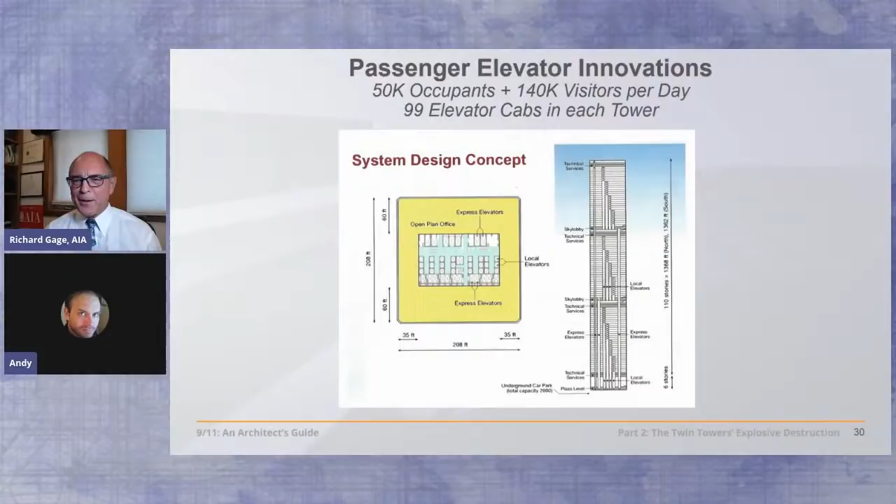They became the tallest buildings in the world, but that was just one of the achievements here. They also got 50,000 office occupants up to their places of work every day in each of the towers, with 140,000 visitors as well. There were 99 elevator cabs in each tower, and they did that by dividing the building into thirds and creating a sub-lobby or sky lobby. And then from there, people would transfer into more local elevators to get to their destination.

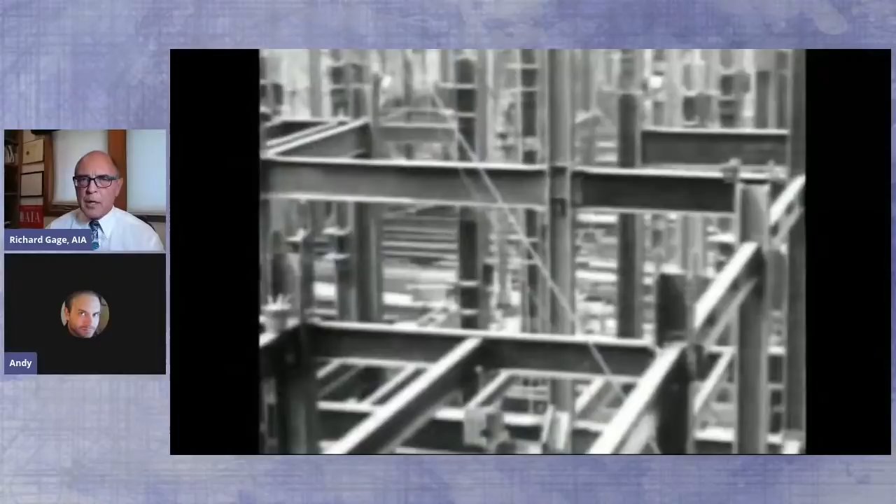But the structural innovation is what's truly extraordinary, because up until that time, we had a forest of columns through skyscrapers in general. With the Twin Towers, what they did was push half the columns out to the outside, becoming an exoskeleton with these 3 vertical columns and 3 horizontal spandrel panels welded in the shop, brought out and erected with bolts on the site. And so this is quite an innovation, because the columns throughout the building before impeded the ability of the tenants to lay out their office spaces.

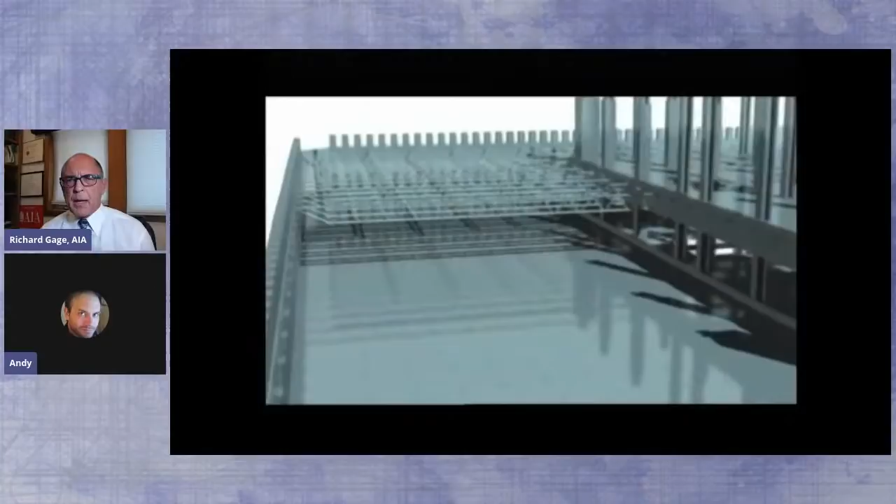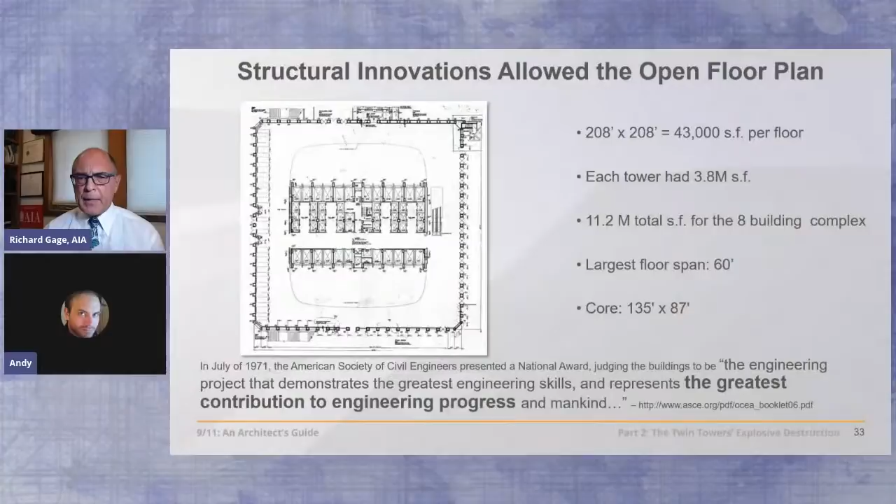In between the interior massive core of 47 impressive steel columns and the exterior were these floor trusses, which spanned up to 60 feet in the long direction, as you can see here, allowing this unimpeded access and layout of their office space. 35 feet on the sides as well. This was a complete innovation in modern office skyscraper design.

But there were still some problems. The ceilings were perceived as being low by the tenants. The columns around the outside were perceived by some as likened unto being in a jail cell, with these columns marching every 3 feet 4 inches all the way around the building. So you have some problems here that still haven't been resolved, because in the 80s and 90s, the structural innovations continued to open up the view to the landscape, the cityscape below.

So also in this building, completed in the 70s, you had asbestos, a huge problem, and the city was requiring the Port Authority to abate the asbestos according to federal law.

That was a huge $5 billion problem. And they also had a lot of electrical, mechanical, and communications systems that had to be upgraded to compete with the surrounding developing cityscape around them of office buildings. So it was a huge problem.

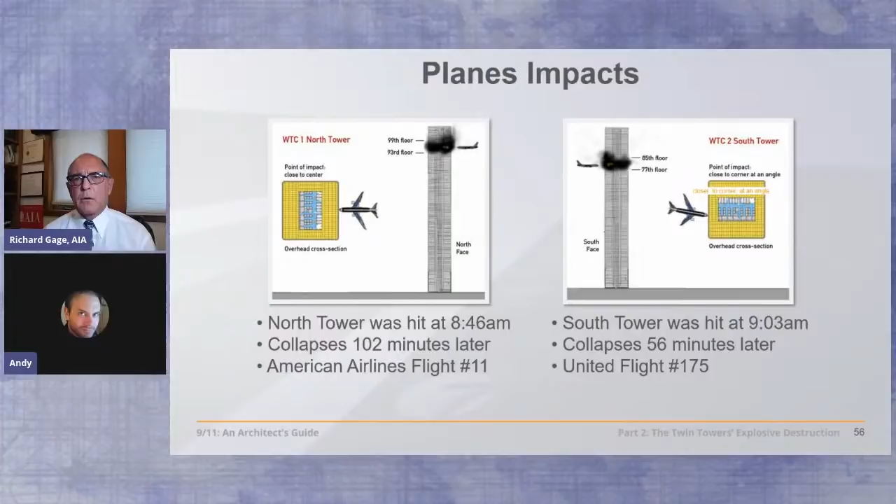Well, there were some official investigations, starting with volunteers who worked themselves into the subsequent investigations, including the FEMA report, which came out in 2002. They finally had $600,000 worth of funding, but their efforts were quite hampered. According to the New York Times, they couldn't get access to the site, to the blueprints of the buildings, crucial information, appealing to the public to get photographs. Their hands were tied. Fascinating.

NIST came along in 2002 and was instructed by Congress to do a thorough job, and they had $20 million worth of funding. And NIST, by the way, is part of the executive branch under the Bush administration. Their leadership was changed out when the Bush administration came in. Their theory was a column failure theory.

Essentially, the buildings had fires that caused the sagging of these floor trusses, because the lightweight steel trusses were said to have had their fireproofing scraped off or knocked off by the airplane impact. This caused them to sag and caused them to pull in the perimeter columns. However, sagging floor trusses can't pull in perimeter columns, so what do they do? They impose an artificial 5,000-pound load to make sure those columns were buckled all the way around the building. So then not being able to support the building.

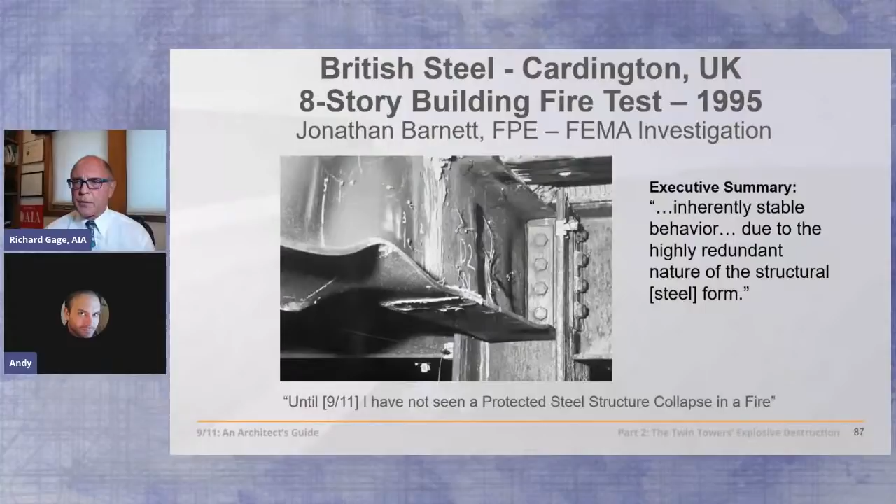But as you can see here, they are the most secure. They don't want the connections to fail. If the beam is going to fail, let it fail somewhere else. They might sag, but they typically don't fail. But let's look at some of these skyscrapers that have endured very hot fires.

May 4th, 1988, the First Interstate Bank, a 62-story building in Los Angeles, California, suffered a 3.5-hour fire which burned across 5 floors and caused an estimated $200 million of damage. It did not collapse. February 23rd, 1991, the One Meridian Plaza, a 38-story building in Philadelphia, suffered an 18-hour fire which burned across 8 floors. The fire caused an estimated $100 million worth of damage and 3 firefighters died fighting it. It was later described by officials as the most significant fire of the century.

It did not collapse. October 17, 2004, the East Tower of the Parque Central complex in Caracas, Venezuela, suffered a 17-hour fire which spread across 26 of its 56 floors. It did not collapse. August 18, 2007, a fire broke out on the 17th floor of the Deutsche Bank building in New York, a building undergoing deconstruction after being heavily damaged by debris from the South Tower on 9/11. Originally 41 stories in height, it had been reduced to 26 at the time of the fire, which lasted 7 hours and affected a total of 10 floors. 2 firefighters died of smoke inhalation.

It did not collapse. On 9/11 itself, 5 World Trade Center, a 9-story building east of the North Tower, was engulfed in flames after sustaining heavy damage from falling debris. A number of partial collapses occurred, but the overall structure remained standing.

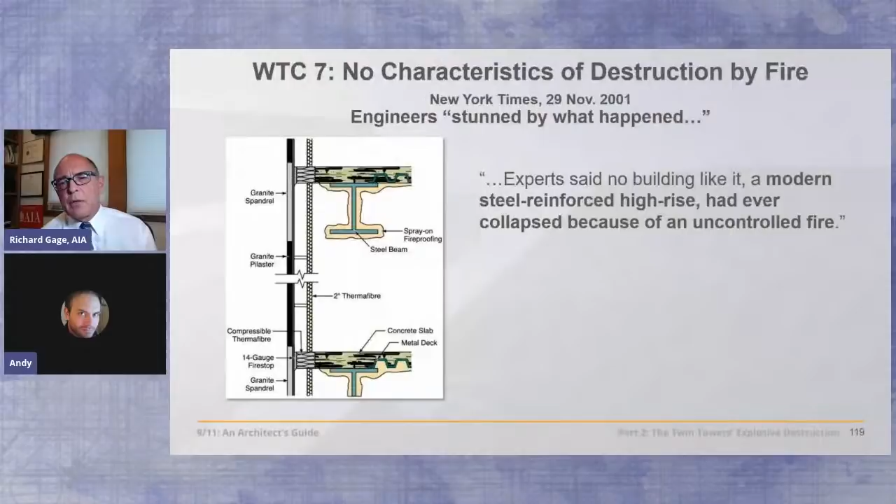So this is obviously, the engineers were stunned by what happened. A modern steel frame high-rise had never collapsed due to uncontrolled fire. Why? Well, one reason is the steel conducts the heat away from the source of the heat. So it never reaches its 1200 degree Fahrenheit temperature, at which it can begin to lose half of its strength and then sag.

But to keep that from happening, and that can happen, we put cementitious fireproofing on, protecting the beams for 2 hours in a fire, and protecting the columns for up to 3 hours in a fire, even though fires don't persist in any one location for more than about 20 or 30 minutes. So this is 4 to 6 times the amount of protection that should be required to protect this steel.

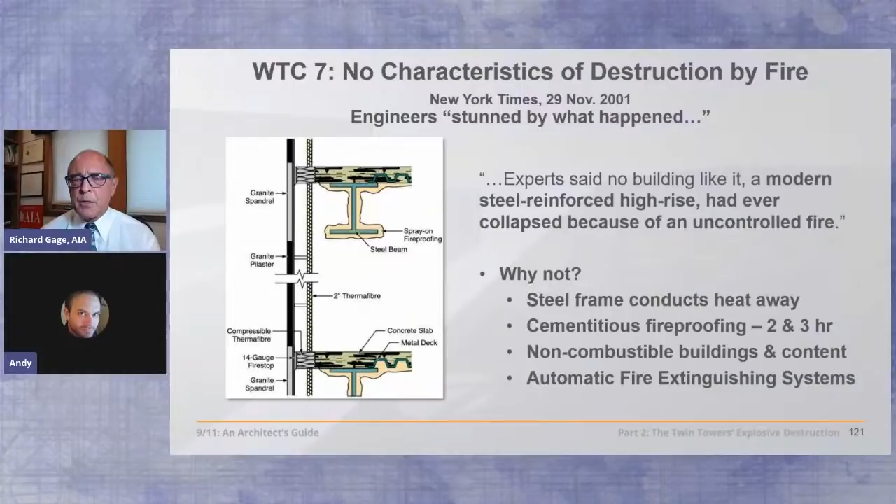But we also require the tenants to not bring in huge fuel loads, and require the contractors to not build these buildings out of combustible materials. And then, on top of all of that, we put sprinklers to keep fires from ever becoming a problem. In the case of the Twin Towers, the sprinklers were said to have been compromised by the plane impacts.

So with additional circumstantial and corroborative evidence, which can be quite helpful, government documentation, foreknowledge of the destruction, experts agreeing, at least those experts without financial or political obligations that might sway their objective opinion in the matter as to what is a controlled demolition.

Video documentation, of course, all can be proof of controlled demolition. A body of proof which we're going to apply now to the Twin Towers, beginning with feature number 1. Is there a sudden onset of destruction? And where is that? At the location of the jet plane impacts, because this is where we are led to focus on the problem, which is said to be the planes and the fires there. So let's take a look.

Here's the North Tower. It's standing still, and then suddenly, smoothly, it drops straight down. No jolting, no hesitation, no impact with floors hitting the next level of intact structure. Let's look at the South Tower, standing still, and all of a sudden, smooth downward descent. So yeah, we do have sudden destruction.

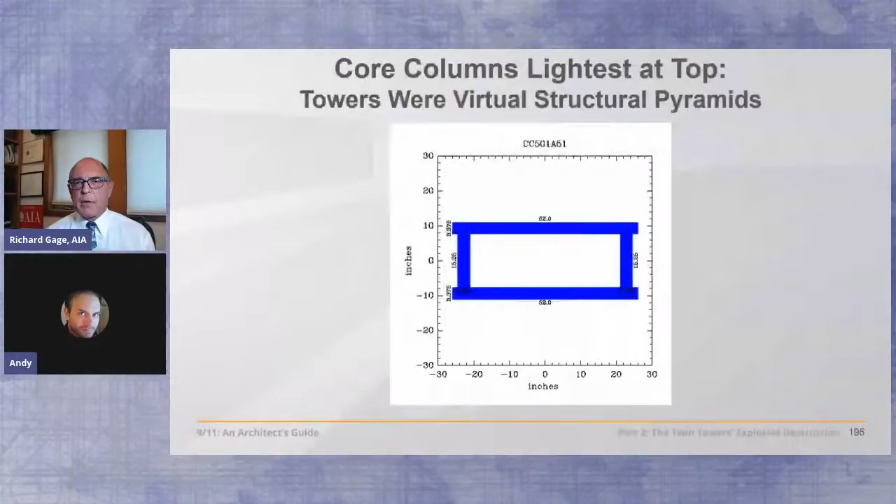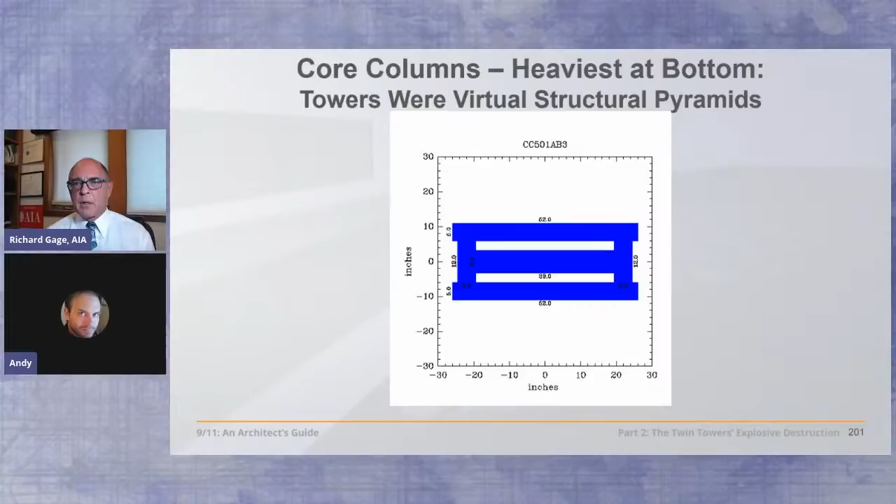The lightest part of a structure and weakest can't possibly destroy the cold, hard steel below, which is heavier and stronger as we go down. This is a column up at the top, but as you go down, they get heavier and heavier like this at mid-height, 2 inches by 32 inches by 16 inches, and then almost solid steel as you get down to the bottom. So there's a real problem with this theory. And it was submitted originally by Zdeněk Bažant from Chicago Northwestern University. It is the crush down, crush up theory, but the paper, interestingly, was submitted just 2 days after 9/11. The rest of us are in shock and awe, trying to figure out, if there are more attacks coming, what happened? We didn't even know that there were hijackers or their identities or what other targets might be aimed at.

So there's a few problems with this paper, many problems. Actually, the formulas are technically correct, but the input data is completely falsified, not to mention obscured, so that engineers couldn't even decode it. But it was finally decoded by some hardworking engineers, and they found what? They completely eliminated a story of columns, 287 columns, so that the building could develop a false impact force on the structure below. The upper section could fall freely for 12 feet. There were only a few broken columns, maybe a dozen or so.

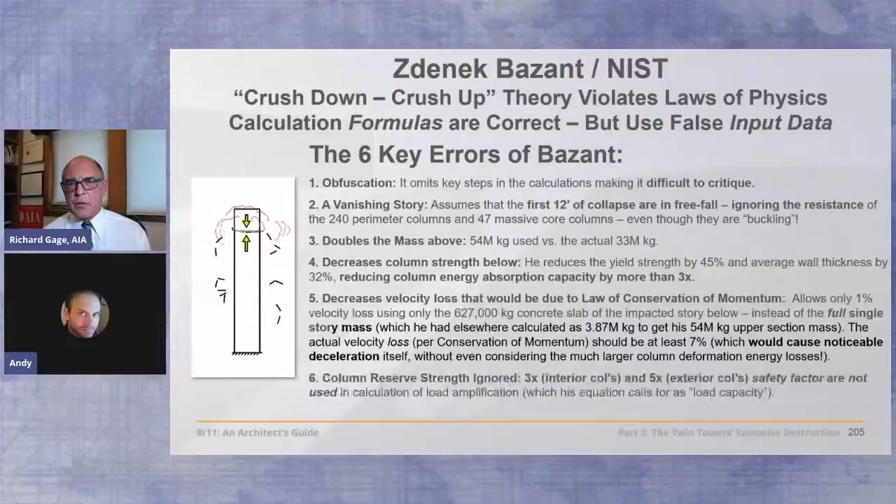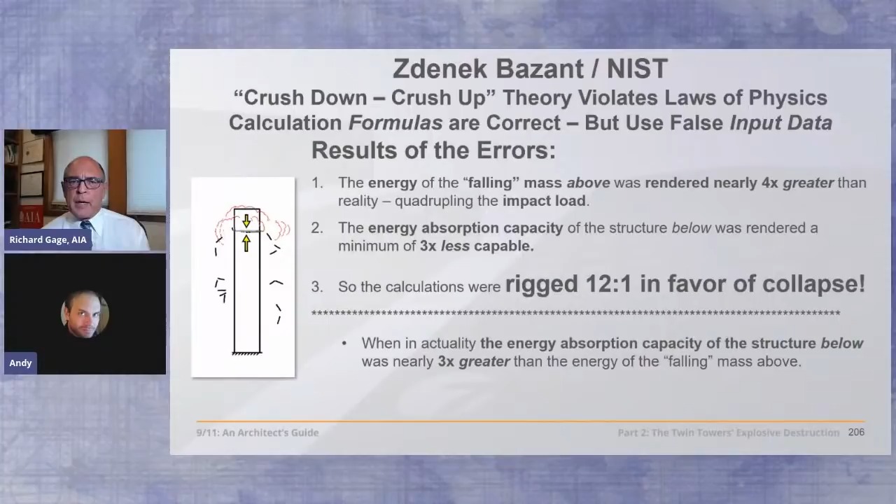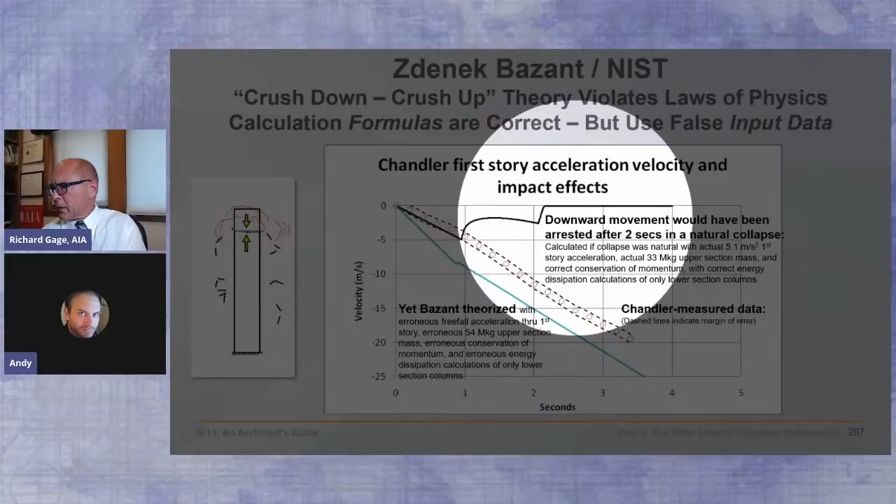We'd lose really quickly the downward momentum, and it would be arrested and come to a stop in just 2 seconds. That's what really would have happened. So there were engineers that refuted these.

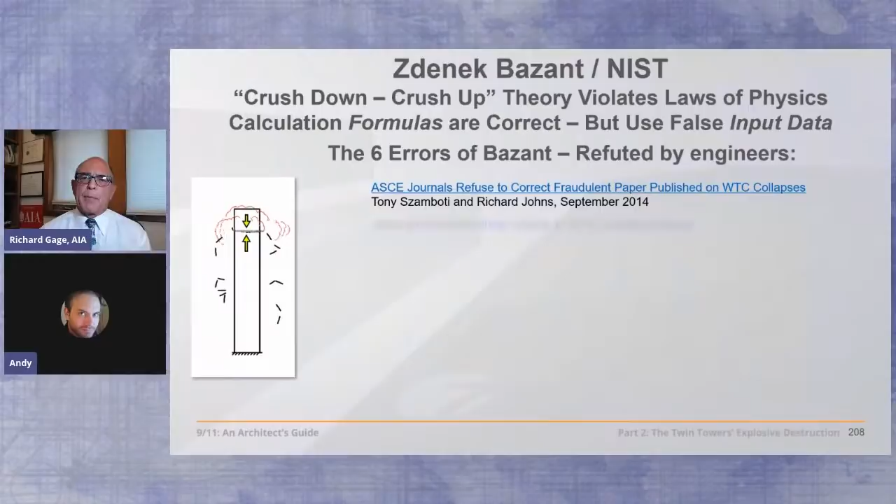The American Society of Civil Engineers journal refused to correct the fraudulent paper that Zdeněk Bažant did. And so Tony Szamboti and Richard Johns and Gregory Szuladzinski submitted papers, except the fraud was upheld by the American Society of Civil Engineers. They won't publish the papers. Why? They say they're out of scope. What? How can it be out of scope to publish a paper that refutes the previously in-scope paper?

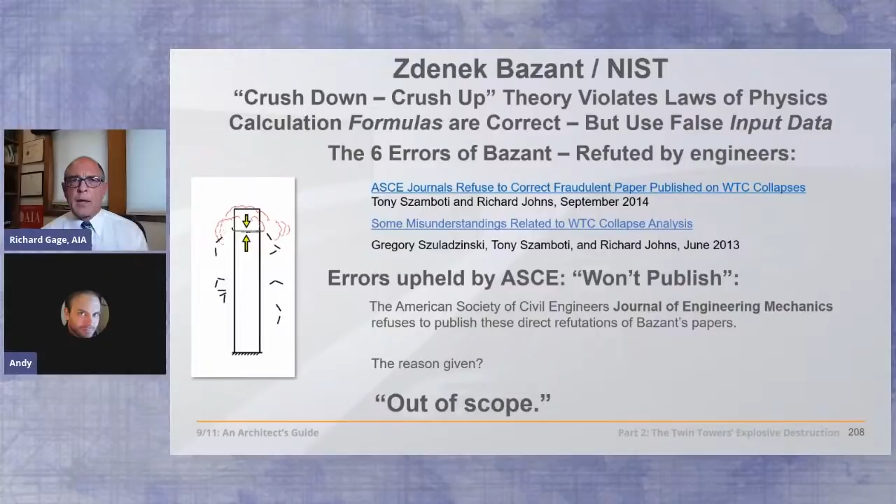Starting and stopping. You see what? Hey, hold on a second. We start and we stop. Just like the firefighters described, bands of explosions all the way around the building.

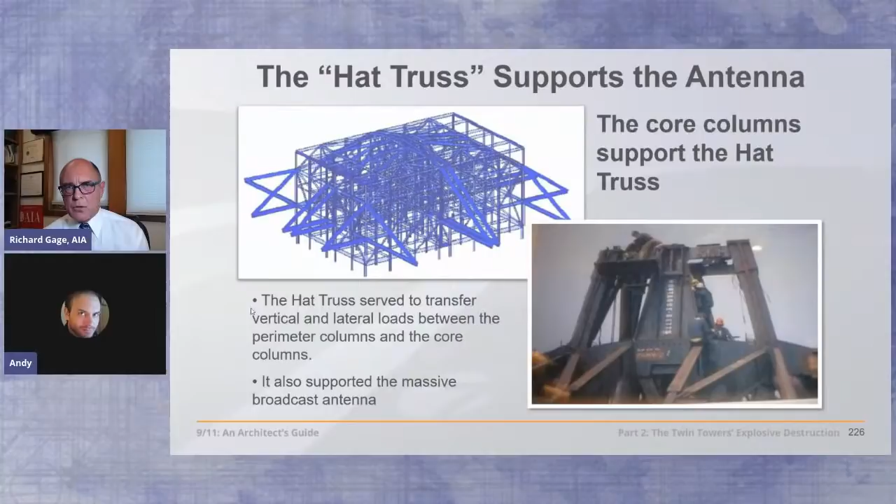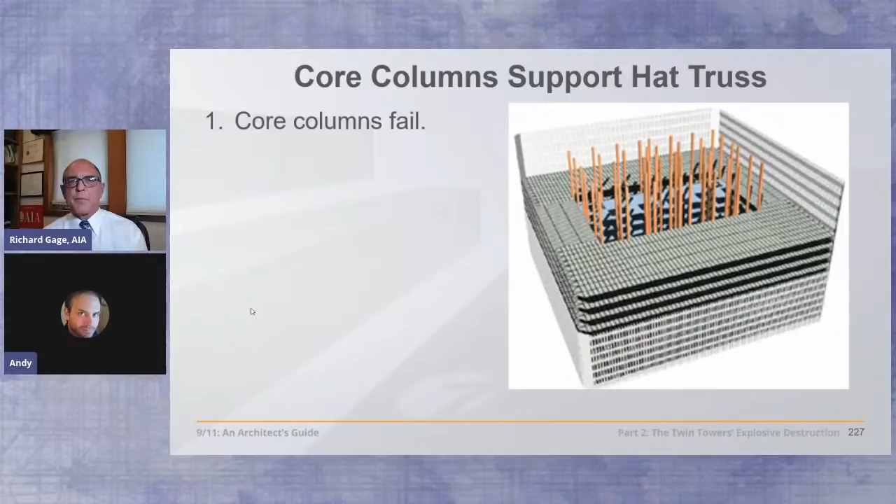Well, what's the antenna sitting on? It sits on the hat truss. What's the hat truss sitting on? It sits on the core columns. So just like FEMA said, the core columns are failing first, contrary to what NIST said, which was the perimeter columns failing first. The hat truss and antenna descend when the core columns descend, because that's what they're sitting on.

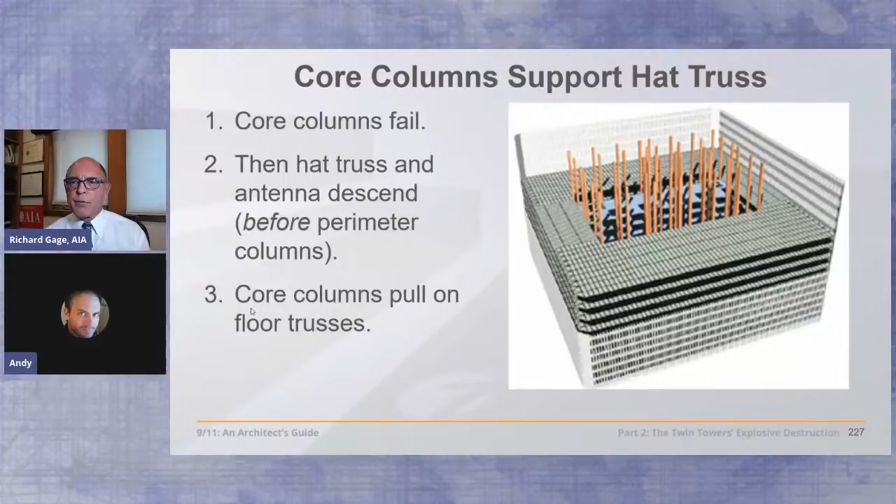The core columns then pull on the floor trusses, and then the floor trusses pull in the perimeter columns. Something like this, which we have in this crude animation from an unknown source. Well, somebody knows it. I don't.

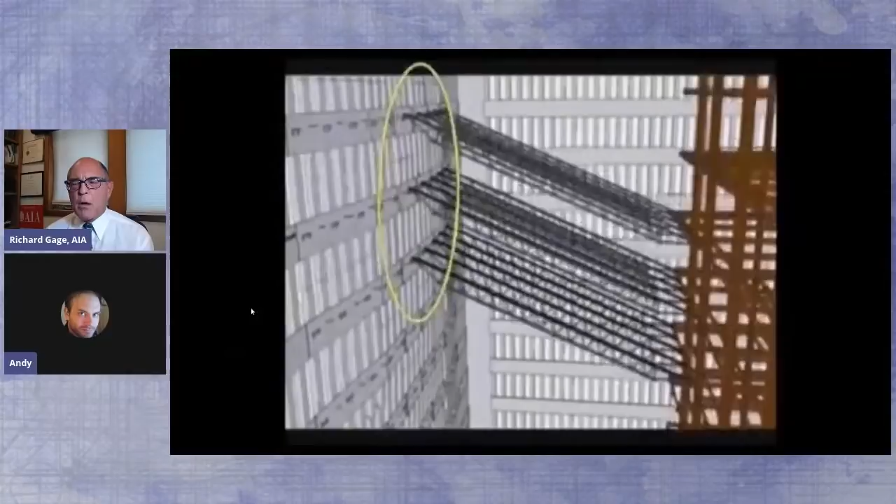So the core columns, what's causing the core columns to descend is the question here, right? Some of those core columns must have been removed. Well, how did that happen? This is all well below the airplane damage, which is at the top of this image.

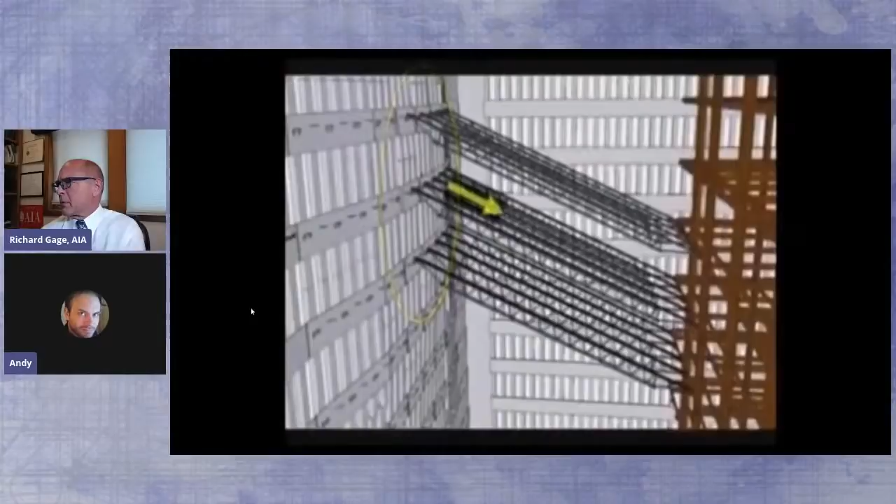In the case of the volcanic eruption in the Tongan Sea in 2009, with upward, outward arching streamers, a geometry of fireworks, freely flying solid objects trailed by thick white smoke clouds, which we'll get to in part 3 of this 3-part series. Does it even look like a gravitational collapse to you?

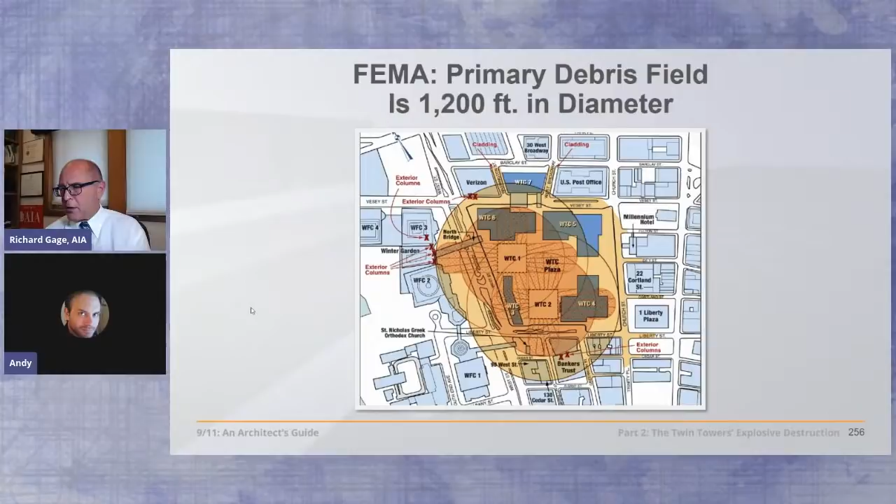We have a 200-foot wide building, but the debris is straight down or symmetrical about the tower, all around it, in a 1,200 to 1,400 foot diameter, as indicated by the FEMA report damage location of the exterior perimeter structural steel sections, destroying the winter gardens in the World Financial Center to the west, 600 feet to the west.

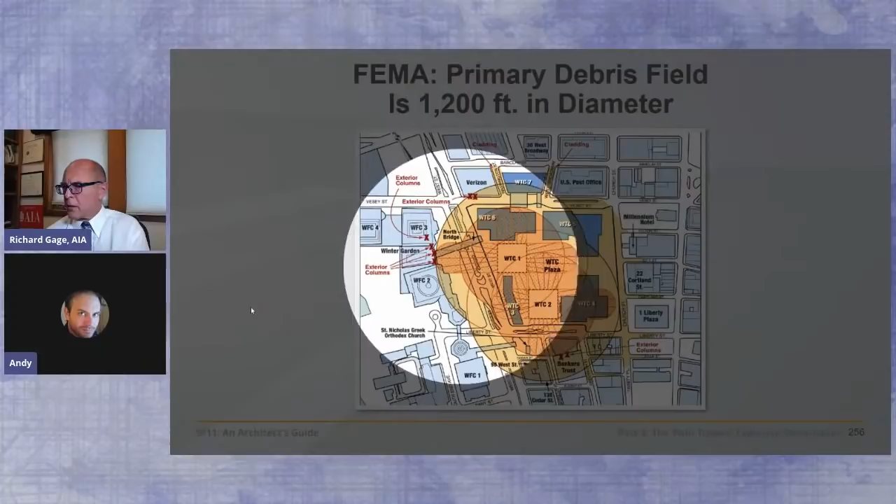As you can see here, the steel frame is completely broken up and distributed symmetrically. Broken up, ready for loading and shipment, actually. Here is the nice, neat pile of Building 7, a classic implosion. Out here, we have the very explosive event known as the destruction of the World Trade Center, evidenced by additional damage inside the World Trade Center 6 particularly.

Do we have ejections of building materials at the lower floors? Well, let's take a look at these isolated explosions occurring 20, 40, 60 stories down below what we're told is a gravitational collapse up above. NIST says, well, these are puffs of air being produced by that pile driver driving the rest of the building down to the ground. That air's got to go somewhere, right? Well, these are not puffs of air. They're solid objects, and we'll see how fast they occur.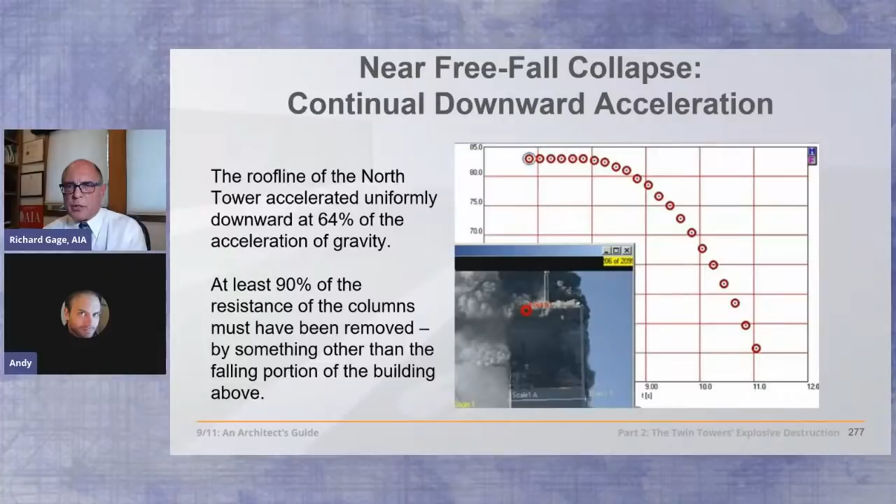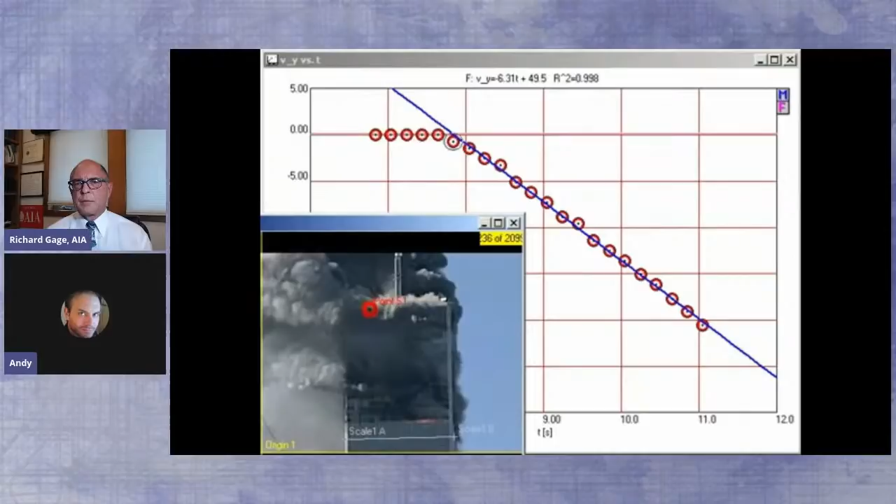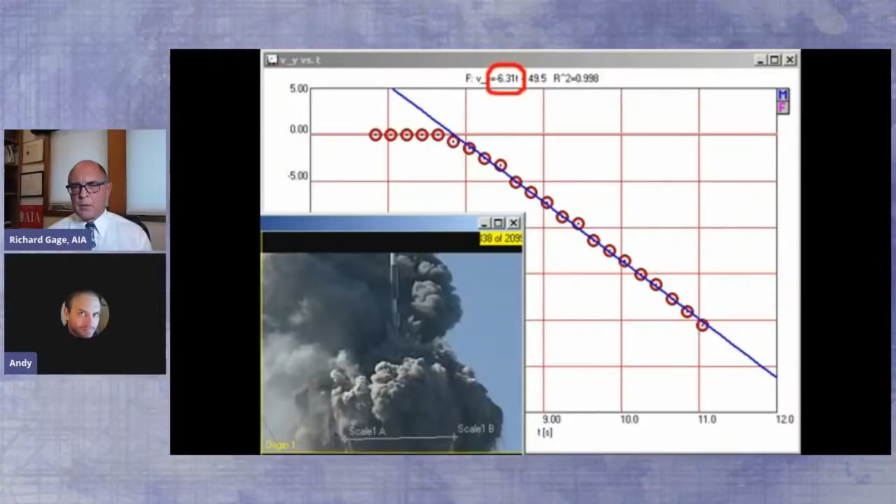We are here tracking the motion of the roofline at 0.2 second intervals through approximately 32 meters or 8 stories. This graph shows the height of the roofline as a function of time. The analysis is simpler if we plot velocity as a function of time. On this kind of a graph, a straight line indicates constant acceleration. First note that there is a sudden onset of collapse, as the point we are tracking makes a sudden transition from being at rest to an approximately constant downward acceleration. The slope of the graph indicates that the acceleration is 6.31 meters per second squared downward, which is 64% of free fall.

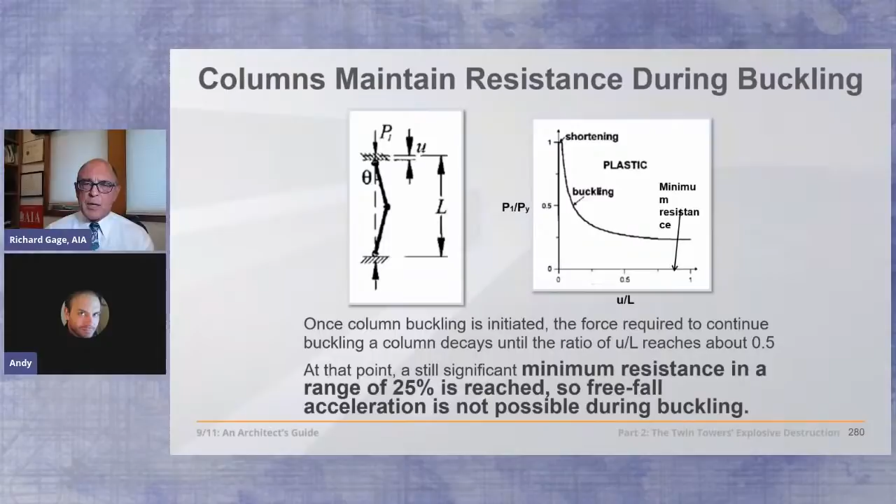64% of free fall, almost free fall. It's not slowing down, it's speeding up. And through what? All of this steel. There's more steel here on the outside than glass. How is it traveling, accelerating straight down through that? Remember, steel columns, when they buckle, still have resistance. Any resistance would slow down the acceleration to deceleration. Steel columns like these have a minimum of 25% of their capacity, even when they're buckled. So that's what's being shown here. Let's look at it another way.

On the right, we have a giant crane holding up a 15-story section, like in the North Tower of this building, over nothing but air. On the left, we take the same section and we even give it 12 feet of magical dropping force so we can develop a dynamic impact on the structure below. Below that, 80,000 tons of structural steel, 5 times stronger than it needs to be to resist a static load up above. We're going to release the lever on these at the same time.

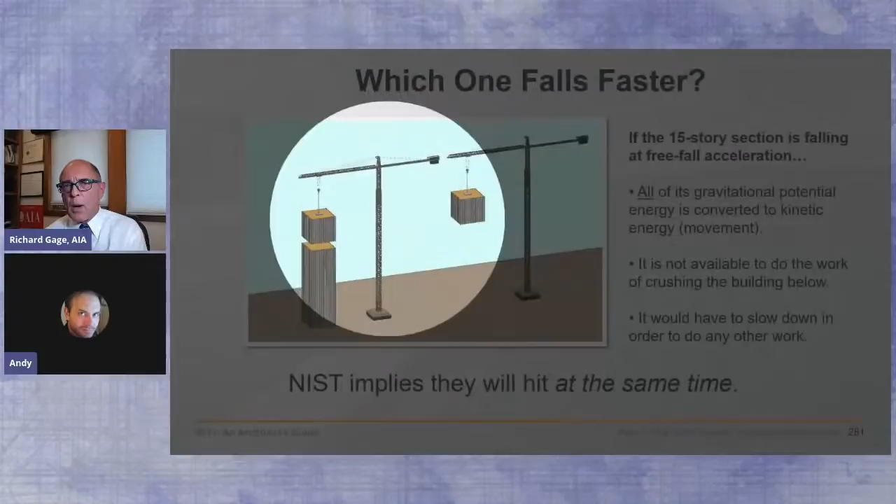What happens? This is 7th grade physics. It's intuitive. We know that the structure on the right is going to fall about as fast as NIST says it did, which is NIST said free fall. Shyam Sunder said that. The left side, it's going to impact and slow down and in all likelihood stop because the structure below, again, is a virtual pyramid. It gets stronger and stronger and stronger. There'll be an equal and opposite destructive force.

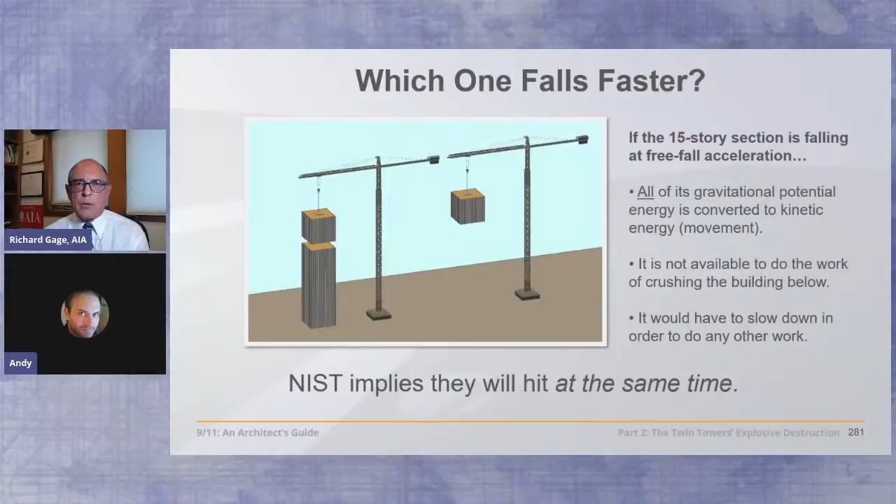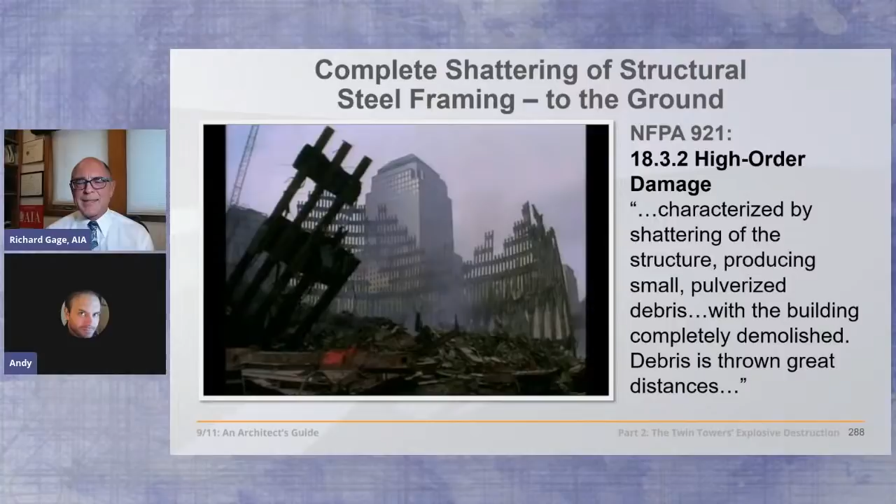Do we have the total shattering of the structural steel frame? Well, the National Fire Protection Association 921, the Guide for Fire and Explosion Investigation, says, look for shrapnel effects, high order damage characterized by the shattering of the structure, producing small pulverized debris, with the building completely demolished and debris thrown great distances. Well, we're going to be looking at all of that. Starting here with the shrapnel effects, the building is completely shattered to the ground, save these remaining shards of perimeter steel structure, broken up into its original 37.5-foot lengths, ready for loading and shipment.

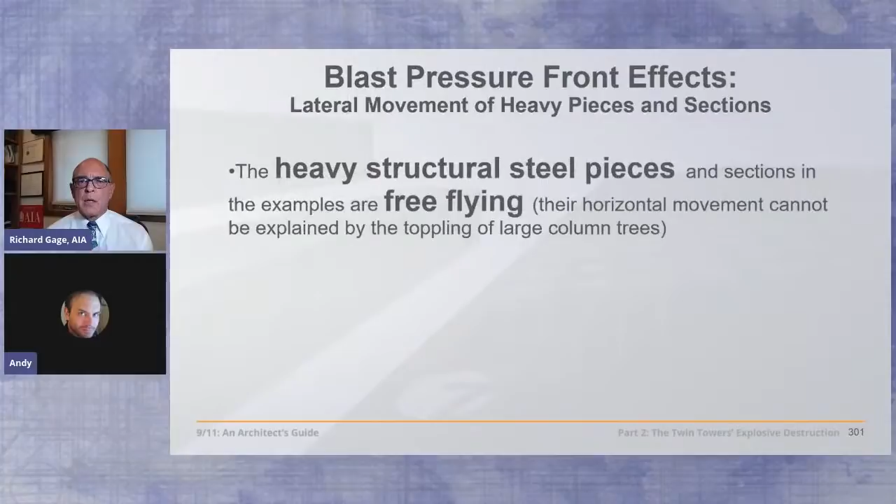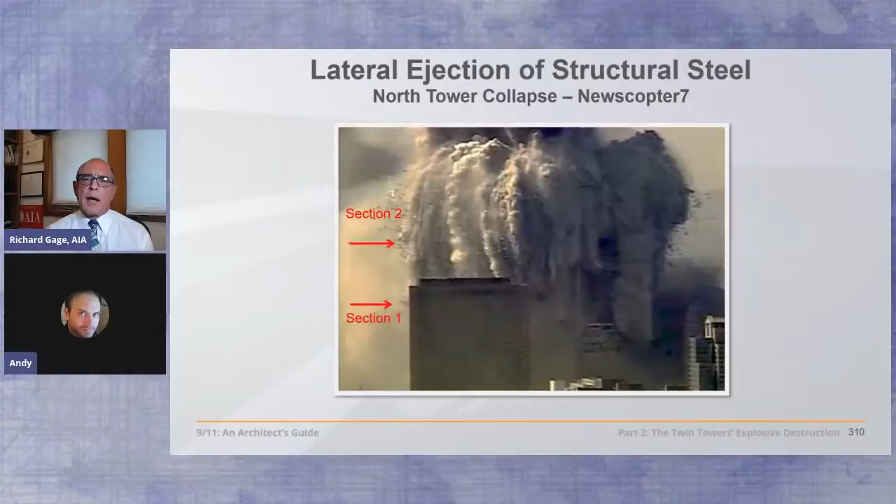Do we have the lateral ejection of structural steel components? Well, going back again to the NFPA 921, it says look for blast pressure wave effects. The heavy structural steel pieces freely flying, like you see, impaled in the surrounding buildings and destroying the winter gardens 600 feet away. And like you see in this stop and start video of these captured moments of these freely flying structural steel sections ejected independently laterally out of the Twin Towers, like this one.

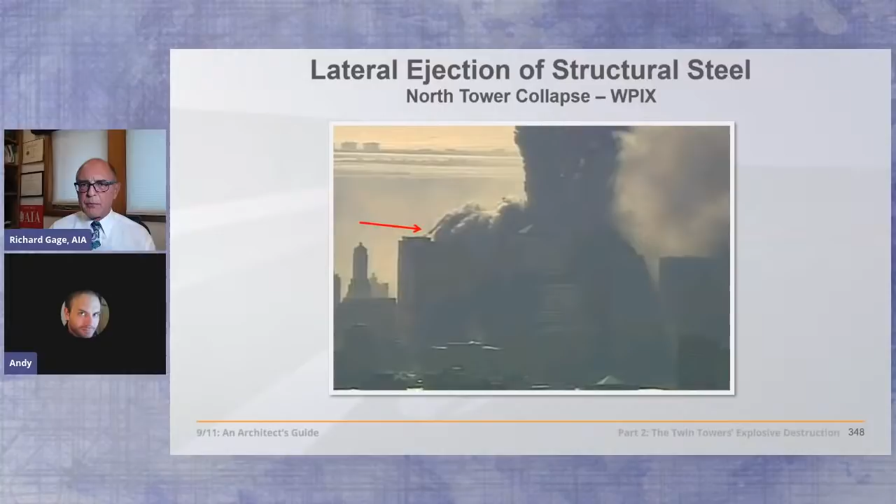This is 45 degrees here; it starts out horizontally, as you can see. In fact, it starts out up, as you can see, but then out, and then gravity begins to take over and pulls at 45. What is the outward force throwing these thousands of 4-ton structural steel sections laterally? Well, let's go to David Chandler and see if we can learn something.

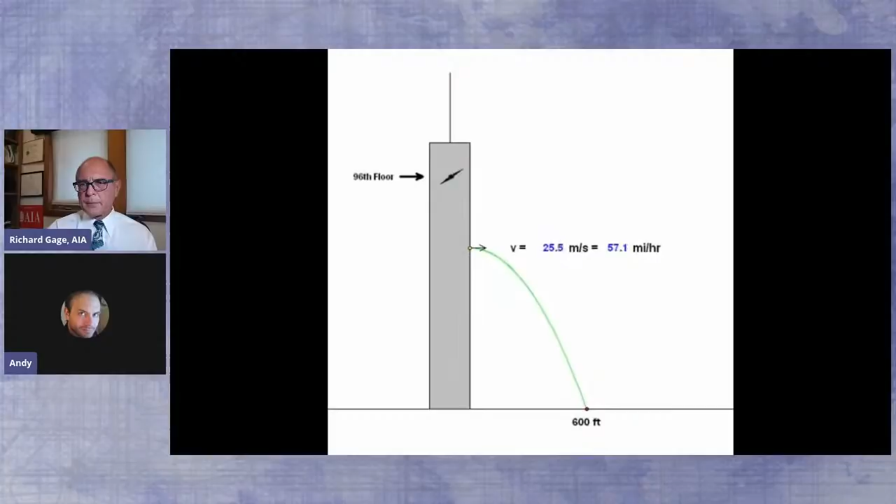Girders weighing several tons were found 600 feet from the base of the North Tower. How fast they were ejected depends on where they originated. If they came from high in the building, they were thrown outward at about 50 miles per hour. If they came from lower down, the speed had to be even greater. Gravity alone cannot account for such high lateral ejection speeds.

I'm here measuring the horizontal speed of what appears to be one or more wall units, which are being thrown northward from the North Tower. Because it was recorded by a handheld camera, I had to first stabilize the image. Then I did the measurements from the stabilized version of the video. Final result, 35 meters per second, which is 78 miles per hour.

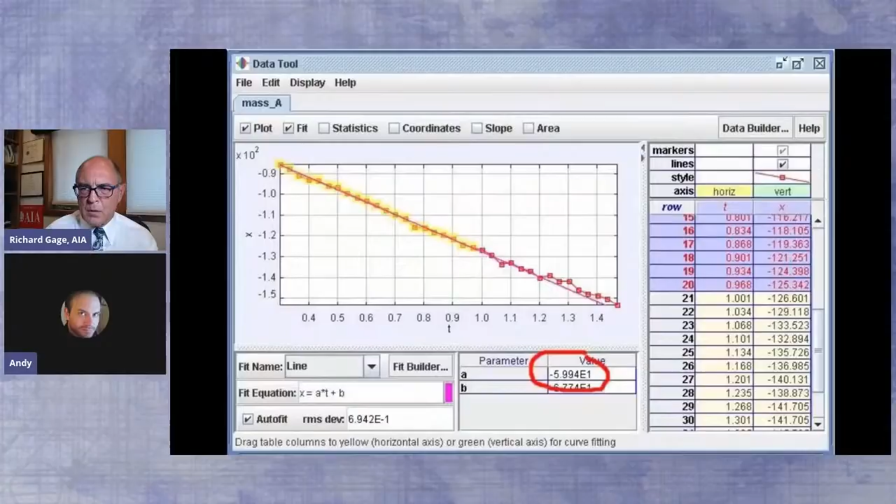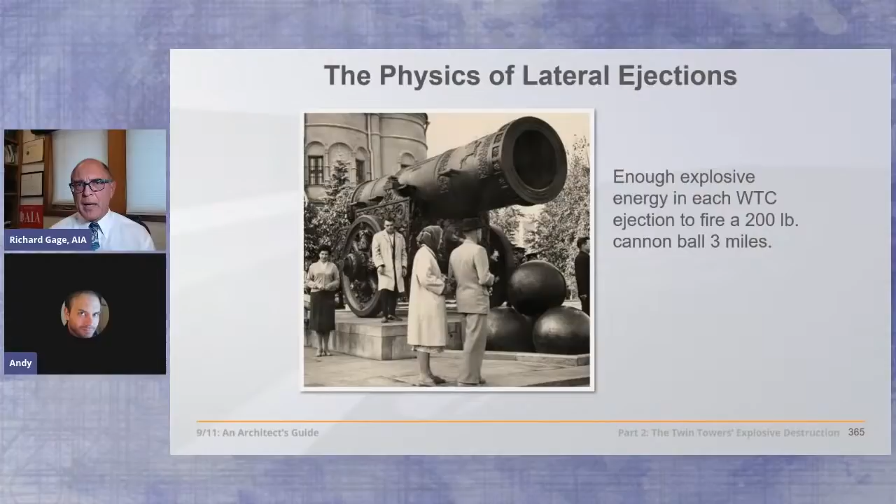So about 80 miles per hour, these are shot out of the World Trade Center. That's enough energy to fire a 200-pound cannonball 3 miles. Where's that energy coming from? And by the way, if 100,000 tons of structural steel framing is distributed, almost all of it outside the footprint, you have to ask yourself, what is crushing the building?

Because it's not available to crush the building below it. What's that crushing force? You say, maybe it's the concrete. Well, let's look at that. Because the concrete is not found down at the bottom either. There's 110 floors, each of them an acre in size, of 4-inch thick and 8-inch thick concrete slabs.

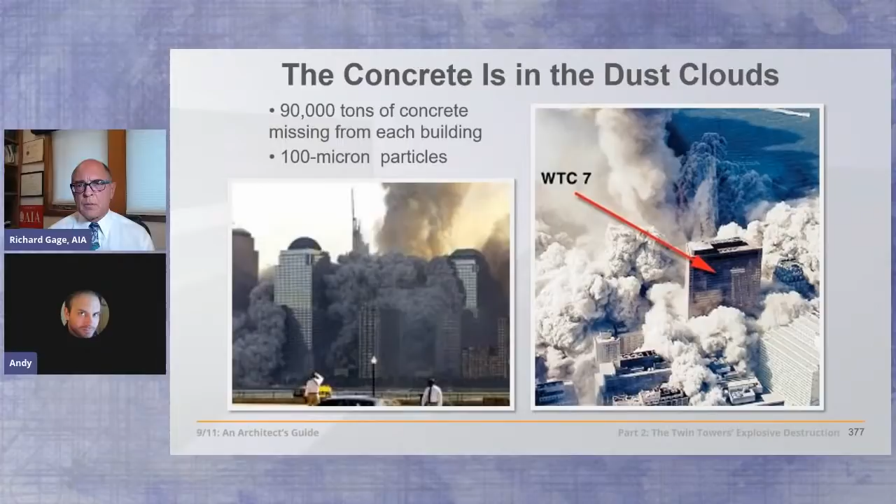And covering lower Manhattan in a 3-inch blanket over a 3 square mile area, 30% of which is powdered concrete. That's where the concrete is.

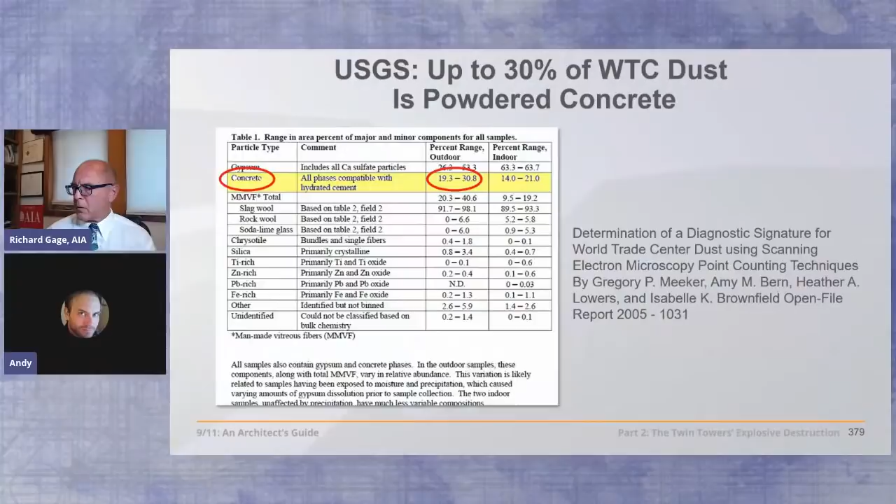And you see, and there's no concrete. There's very little concrete. All you see is aluminum and steel. What happened to the concrete? The concrete was pulverized. And I was down here Tuesday, and it was like you were on a foreign planet. All of lower Manhattan, not just this site, from river to river, there was dust, powder, 2-3 inches thick. The concrete was just pulverized.

You have two 110-story office buildings. You don't find a desk. You don't find a chair. You don't find a telephone, a computer. The biggest piece of a telephone I found was half of the keypad, and it was about this big. The building collapsed to dust.

What I expected to see was nothing like what I actually did see at the time of my arrival at the site. There wasn't much that you could say, you could describe. Everything was dust and metal. There was no typewriters, there was no chairs, there was no nothing.

Well, by the way, oh boy, hang on one second. We're gonna fix this. There we go.

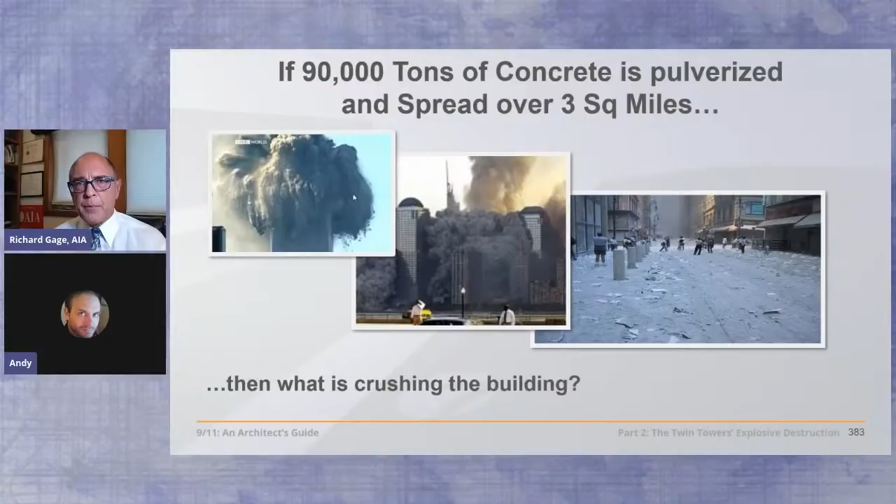If 90,000 tons of concrete is pulverized and spread over 3 square miles, what's crushing the building? It wasn't the steel. It's not the concrete. Together, these are more than 2/3 the weight of the building. They're not available to crush the building. Think about it. Something else is destroying this building.

And all the file cabinets, except for this one, which is the only one that they could find. It was saved, I guess, because it was in the basement. It was in an ice cream store. Where did 10,000 file cabinets, steel file cabinets, go? Where did the people go?

In April 2006, New Yorkers were distressed to learn that bone fragments, human remains from 9/11, had been found on the roof of the nearby Deutsche Bank building. And how, in God's name, did those fragments get there? And bone fragments less than a centimeter long. How could they be so small?

Wait a minute. We're talking about 700 bone fragments found on the top of this building, the Deutsche Bank building. Well, they didn't come from the people in this airplane because it hit the South Tower and its ejections went out this way. It didn't come from the people in this airplane because it hit the North Tower and those ejections were blocked from hitting the Deutsche Bank building by the South Tower. So they're not from the people in the planes.

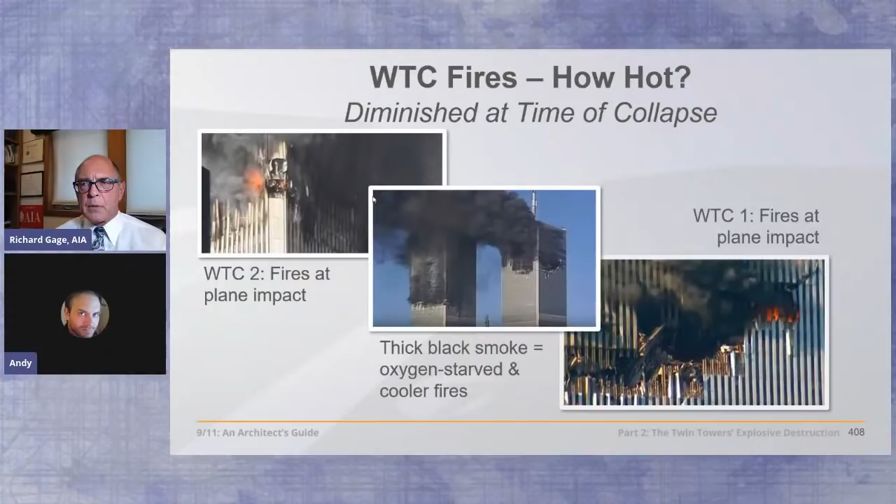And what we've seen so far in part 2 of this 3-part series is direct evidence of destruction with explosives. Fire doesn't create these features, especially these fires that are diminished and cooler, indicated by the thick black smoke. With additional testimony and research work on the part of Graeme MacQueen in 2015, he increased that number from 118 witnesses among these 503 FDNY professionals to 156 that observed explosions. So that work is now available. And 36 reporters, additionally, TV reporters, brought us the Twin Towers explosive demolition also.

Let's dig into this, because there's a widely held belief that the Twin Towers collapsed as a result of the airplane impacts and the resulting fires. That's a revisionist history or theory we're going to show you. The vast majority of TV reporters on the ground who witnessed and who reported the event firsthand cited explosions as the cause of the collapse, which you're going to see here. Most people have no idea because the story changed abruptly the next day when the local TV anchors and national mainstream outlets reported a different story.

Fire Marshal John Coyle, firefighter Christopher Fenyo, explicitly support this finding.

I thought it was exploding, actually. That's what I thought for hours afterward. Everybody, I think, at that point still thought these things were blown up, as we heard earlier. At that point, a debate began to rage about whether to continue the rescue operations in the other still standing tower, because the perception was the building looked like it had been taken out with charges. And firefighters don't go into buildings that are exploding. They're not supposed to.

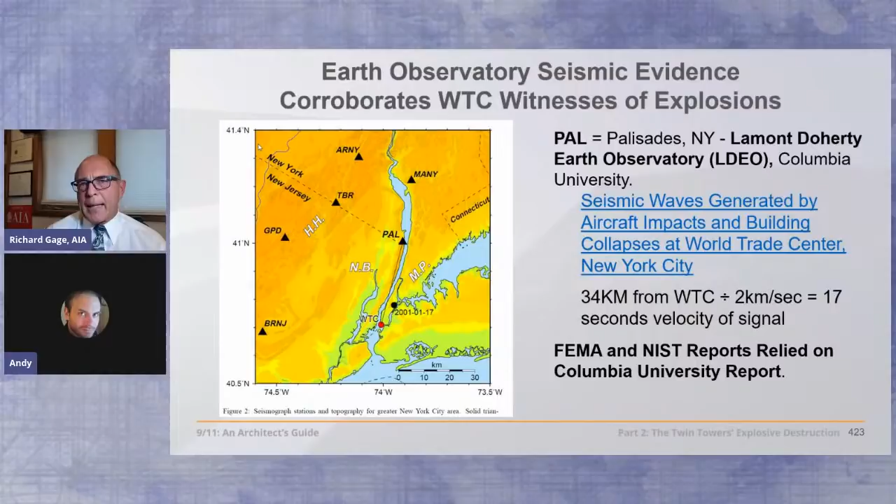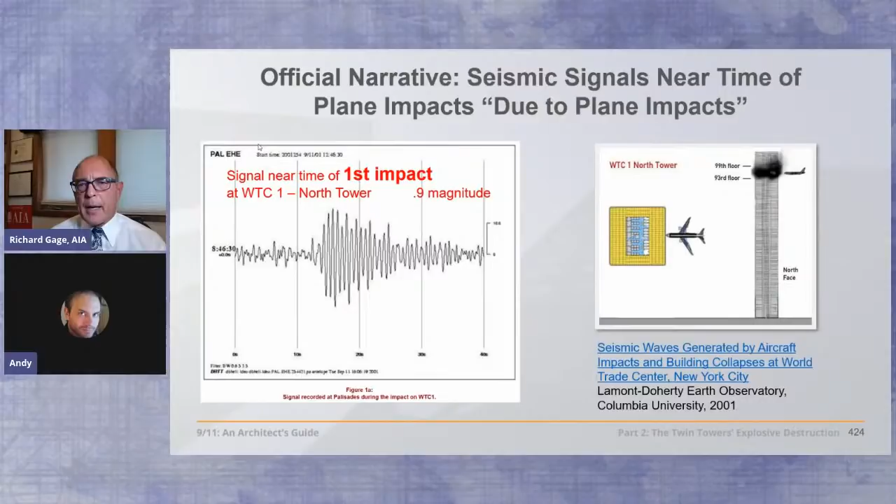What did they witness? Now, FEMA and NIST reports relied on the Columbia University report, and there were seismic signals near the time of the airplane impacts. So necessarily, perhaps it was deemed to be caused by the plane impacts. Maybe a rational hypothesis at first. So let's look at it in greater clarity.

Let's dig into this, though, because the seismic event occurs at 8:46 and 26 seconds, but the plane doesn't impact for another 14 seconds, according to the NTSB radar, which is accurate to within a second. So how can the plane impacts cause the seismic event 14 seconds earlier? Doesn't make sense. NIST comes along and says, well, gosh, we reviewed the videos and we think the plane impacted 10 seconds earlier than that. What? You're just going to ignore the NTSB radar that the 9/11 Commission relied on that's accurate to within 1 second? Well, you still got 4 seconds. So what are you going to do with that?

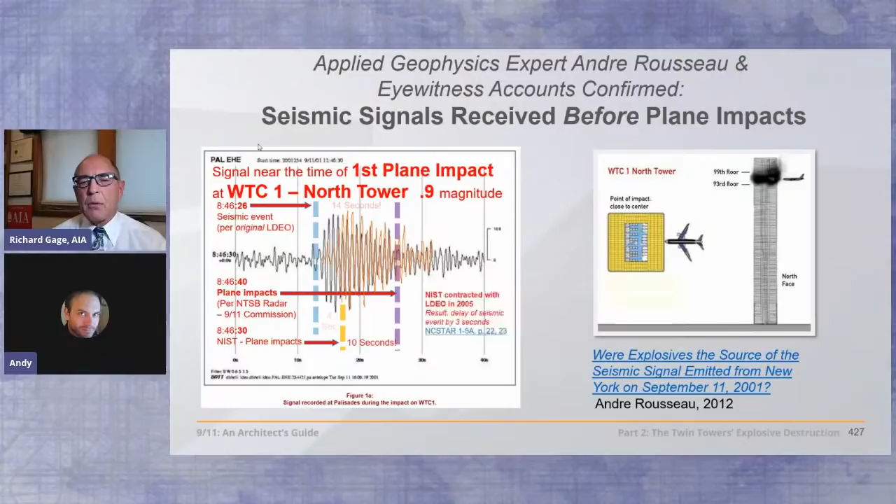They went back to LDEO, Columbia University, which runs the observatory, contracted with them privately, producing a report that we can't see that somehow got them to move their data back 3 seconds. So now they're only off by 1 second. This is the kind of tampering with evidence that has to be looked at carefully in a real investigation.

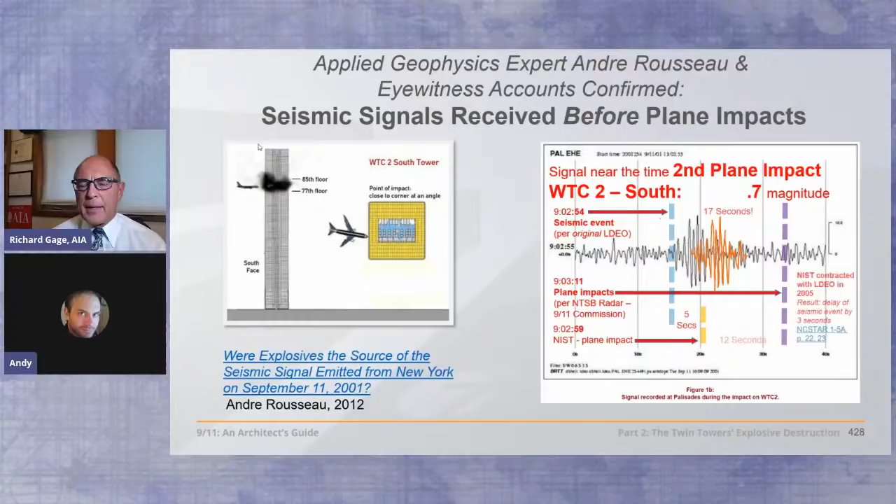What about the second plane impact at the South Tower? 0.7 magnitude event occurring at 9:02 and 54 seconds. But according to NTSB, the plane doesn't hit until 17 seconds later. NIST comes back and says, well, we looked at the videos, we did some timings, and we think they're wrong. Plane impacted 12 seconds earlier than that. What? But you're still off by 5 seconds. What to do? Go back to LDEO and get them to move their data back 3 seconds in the same report that we can't have access to.

Okay, well, what could have produced seismic events at that time in the towers? Mike Pecoraro said the whole building seemed to shake and there was a loud explosion. When they arrived at the C level of the basement halfway down, they found the machine shop gone, nothing there but rubble. We're talking about a 50-ton hydraulic press, gone. The two made their way to the parking garage, found it too was gone.

I don't know what that means, but it's extensive damage, certainly. A steel and concrete fire door that weighed 300 pounds, wrinkled up like a piece of aluminum foil and lying on the floor. A bomb had gone off in the building. He's not the only one. There were many. And here's another. William Rodriguez, janitor, a hero according to George Bush and many others, because he saved so many people.

He says the bomb went off in the basement before the plane hit the building. He's been consistent about this story for almost 20 years.

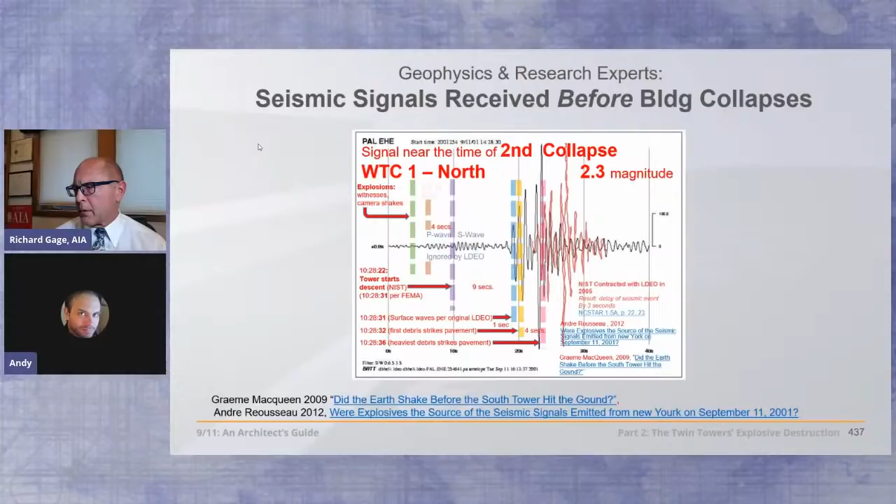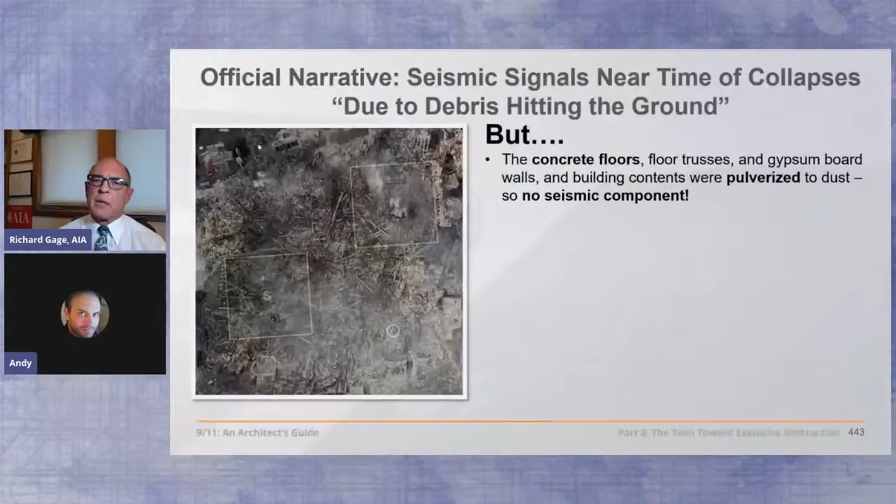The official narrative is that it's due to the debris hitting the ground, but we have a problem with this, right? It's not hitting the ground. It's hitting concrete floors that are suspended over the ground, i.e. the parking structure. And we're talking about no component from the concrete at all, because it's been pulverized to dust, right? The floor truss is pulverized, the gypsum board pulverized. The steel frame is shattered to individual wall units, 4 to 8 tons, peppering the ground over 15 seconds or 12 seconds. They're equally distributed around the entire World Trade Center superblock. So they're not coming down in one place or one time.

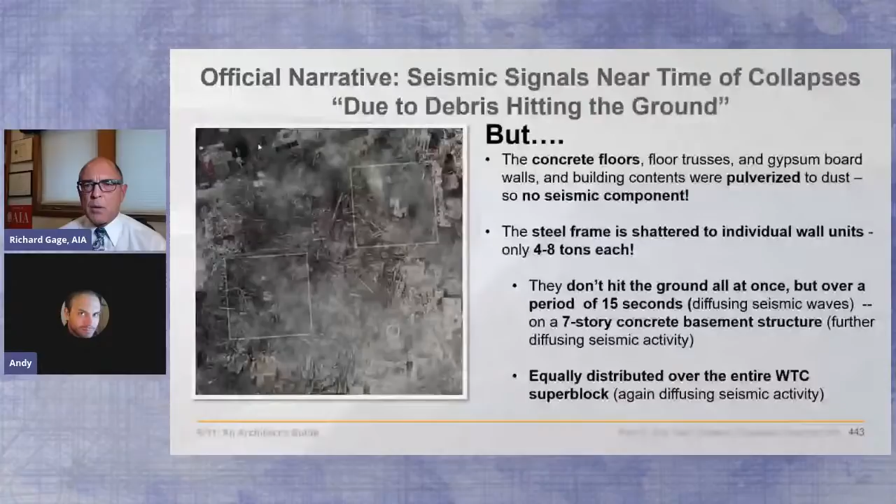As you can see, these towers have identical collapses. So they should also have identical seismic components, but they don't. The North Tower is 1.6 times greater than the South Tower in energy release. This is what you get with the logarithmic scale, 2.3 versus 2.1. That's a 1.6 times greater energy. So what could be responsible for that? We have explosions that are apparently more conducive to higher energy release in the North Tower. Andre Rousseau says identical buildings and nearly identical collapses can't possibly produce seismic events of extremely different energy releases on an order of magnitude.

This is very well summed up by Consensus 9/11, the best 9/11 evidence panel, with Elizabeth Woodworth and David Ray Griffin leading the effort there. This is a point TT7. Why did the Twin Towers collapse? The seismic evidence. Very well summarized. And some people say, well, gosh, the Seattle Kingdome made a 2.3 magnitude event. Well, it was a 25,000 ton concrete roof that impacts the ground virtually at once. We're not comparing apples to apples here at all. So these sources of research can be very important for your efforts in learning more as well.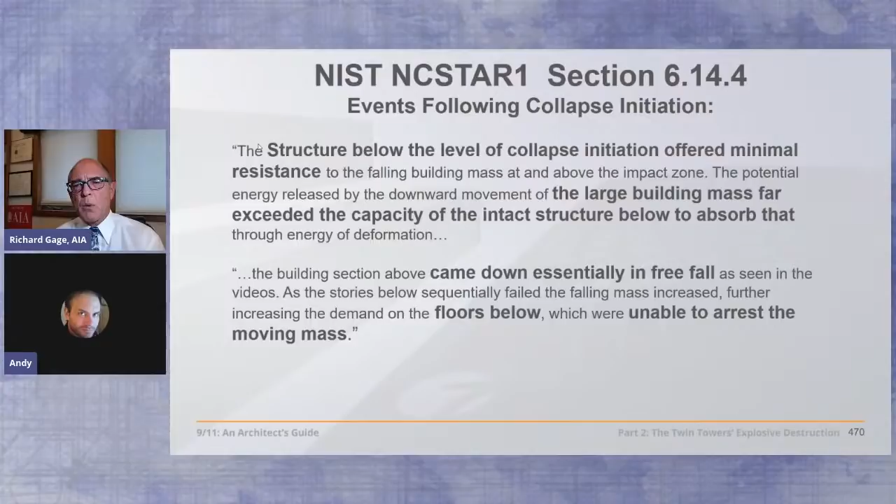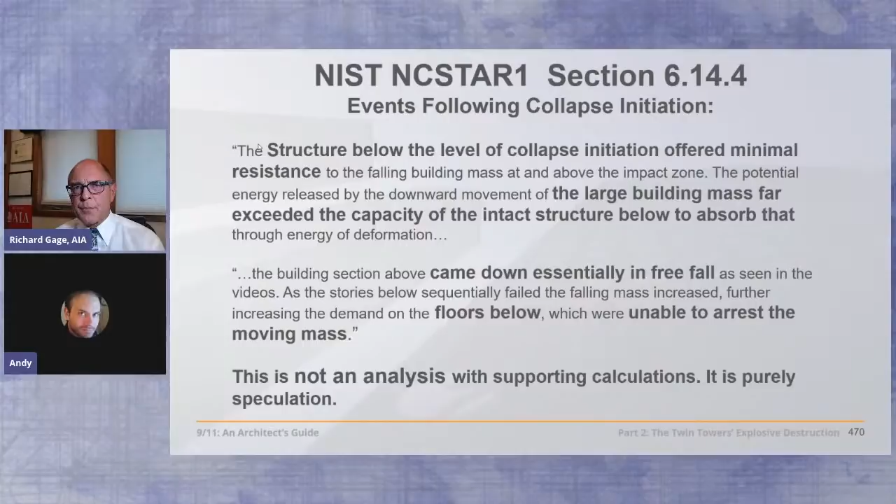Well, let's read it. The structure below the level of collapse initiation offered minimal resistance. The large building mass far exceeded the capacity of the intact structure below to absorb that through deformation. Came down essentially in free fall. The floors below were unable to arrest the moving mass. This is not calculation or explanation. It is speculation. It's a pre-collapse report, which should have been called the final report on the initiation of collapse. Why did they avoid the collapse itself?

Because had they gone any further in their investigation, they would have had to account for all of the explosive evidence that actually brought down the towers. They would have had to calculate the capability of the intact cold hard structure below to resist a free-falling or near free-falling mass impacting it from above. But they could avoid all of that.

So in their response to a request for correction, which we've now issued 2, they write back and they say, we were unable to provide a full explanation of the total collapse of the towers. Absolutely right. And they go further and say, we found no corroborating evidence to suggest that explosives were used. Well, they admit in writing, NIST did not test for the presence of explosive residue. Well, wait, you can't find what you will not test for, and they didn't.

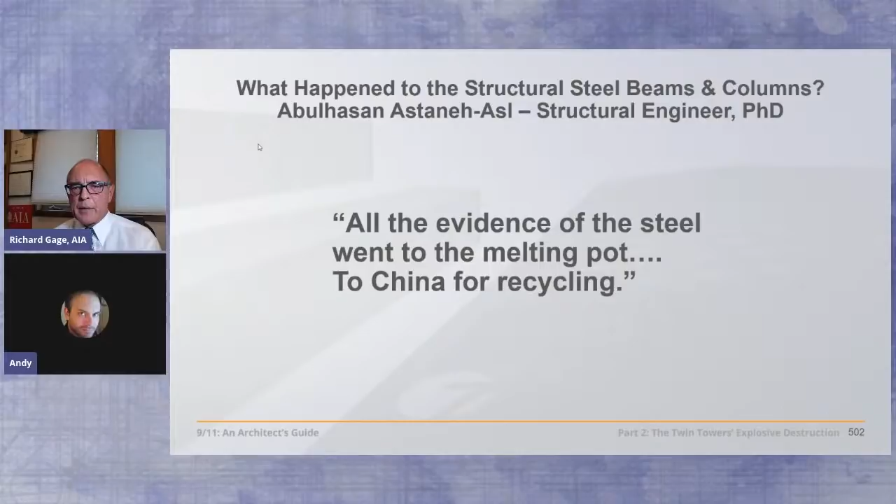How about the evidence itself? Surely it was preserved in easily the three most puzzling structural failures in history. How about Abulhasan Astaneh-Asl, structural engineer? After 9/11, we realized that the Port Authority of New York and New Jersey has sent all the steel that we need to study, that's why I'm here to study steel, to a recycling plant to go to China for recycling. For what? For 15 cents a pound. Just nothing. And all the evidence of steel went to the melting pot, to China, for recycling.

What? Prompting Bill Manning, editor-in-chief of Fire Engineering magazine, to cry out: crucial evidence that could answer many questions is on the slow boat to China, showing an astounding ignorance of government officials to the value of a thorough scientific investigation. The destruction and removal of evidence must stop immediately. But it didn't. In these incredible structural failures we have, within 2 weeks after 9/11, 400 truckloads per day removing this debris. This is the illegal destruction of evidence in a crime scene,

which has prompted so many architects and engineers to come to the conclusion, based on the use of the scientific method, that explosions and controlled demolition are what's responsible here. But what do you think? What is your opinion? Do we have this week the 8 key characteristic features of direct evidence, at least, of destruction with explosives? Can any of these features be attributed to fire? No, let alone all of them, with additional circumstantial corroborative testimony by others, which we've been looking at. This, to so many, is proof of controlled demolition.

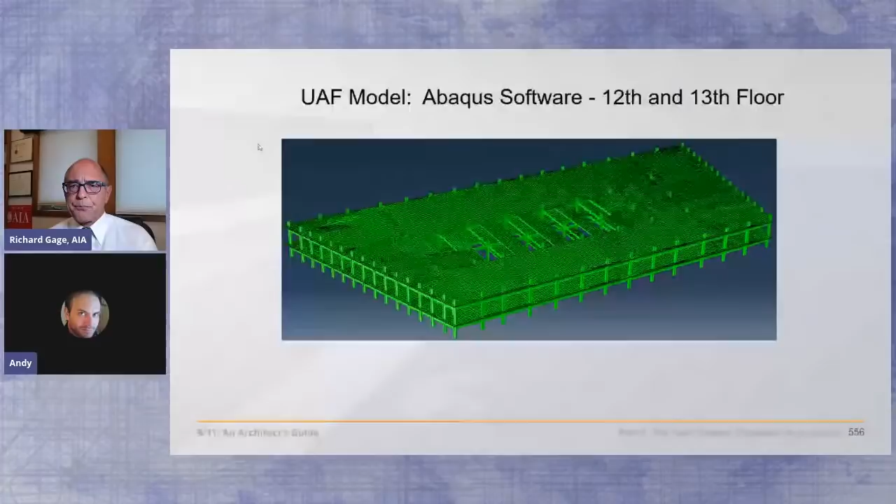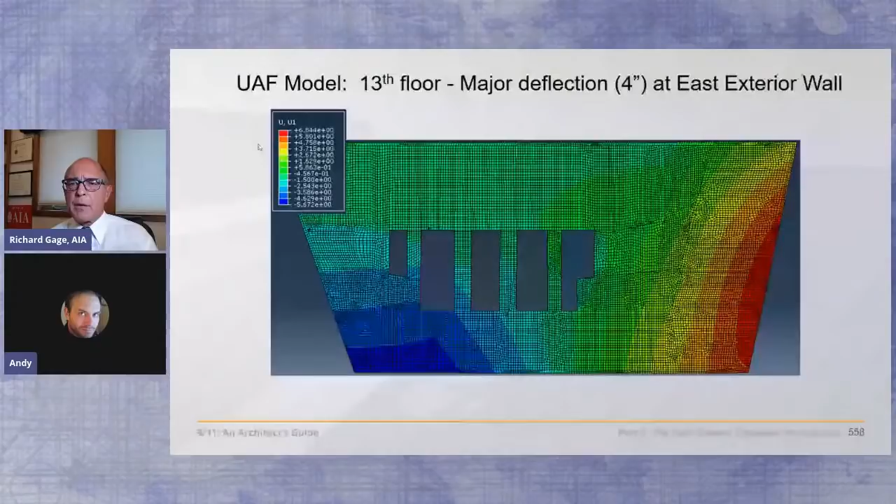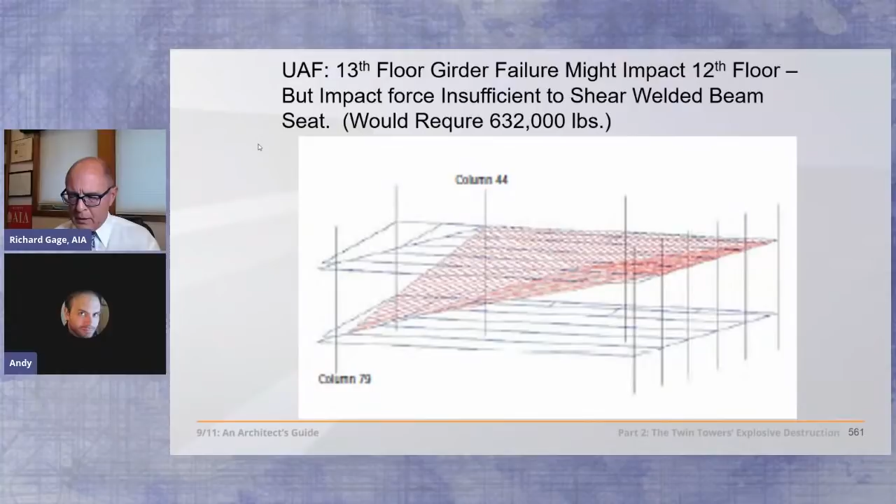And we have also all of this work that he did using two competing models for World Trade Center Building 7, modeling the fires and the structural response to the fires, and completely disproving the NIST theory that Building 7 came down due to those fires. And all of that was documented by Dylan Avery in the movie 7. So I encourage you to take a look at that.

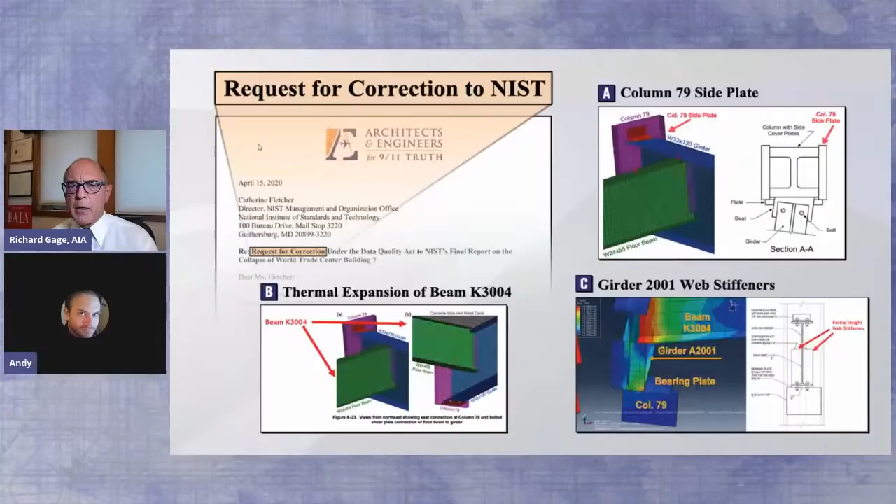It's available on DVD, available also on Amazon.com, and includes some of the work that we've done in our request for correction submitted to NIST, demanding a reality from them instead of the lies and the fraud that they have perpetrated on the American people and on structural engineers. And all of this you can take to Congress. Andy, how does that work?

Absolutely. Our congressmen are supposed to be there to represent us. And of course, this issue is very important to this audience, what happened to the Twin Towers and World Trade Center 7 on September 11th. So we've got to take it to Congress.

Now, the first step is to go to your congressman or congresswoman's website and find how to get a meeting with them. Most of them will take it over the phone right now because of the current situation with the pandemic. And you can select to have a meeting with them and make the request and include Architects and Engineers for 9/11 Truth. We'll come on the meeting with you and we will talk to them about the evidence and, of course, about the Bobby McIlvaine World Trade Center Investigation Act.

It's a path to justice for the nearly 3,000 people who died on that day, and is named after Bobby McIlvaine, who was killed outside the North Tower lobby as he was entering on that morning. So what it would do is it would create a select committee. It can be passed in either House of Congress to look into the evidence that Richard has been presenting for years. So we need Congress to act on this, but they don't do anything unless they hear from their constituents. So that's why you need to get involved and take that first step.

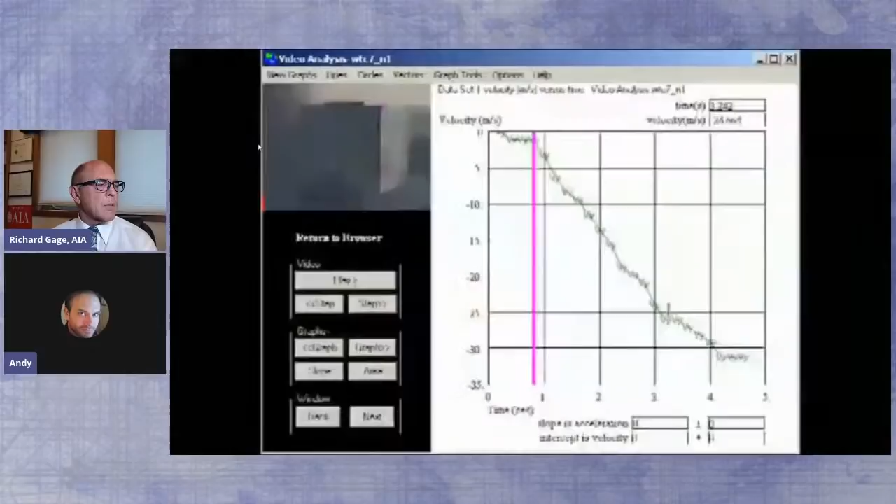More than 1,500 architects and engineers and 12,000 others, including many scientists, have signed the petition calling for a scientific investigation of the destruction of the Twin Towers and World Trade Center Building 7. The report, issued by the National Institute of Standards and Technology, referred to as NIST, was not valid science. They're talking about a single column failure that resulted in a total collapse of the building. Building number 7 descended in free fall for the first 100 feet, which means that there was absolutely no resistance to the descent whatsoever. So all of the columns really needed to be severed at the same time. The symmetry is the smoking gun. NIST has admitted it went into free fall for 8 stories.

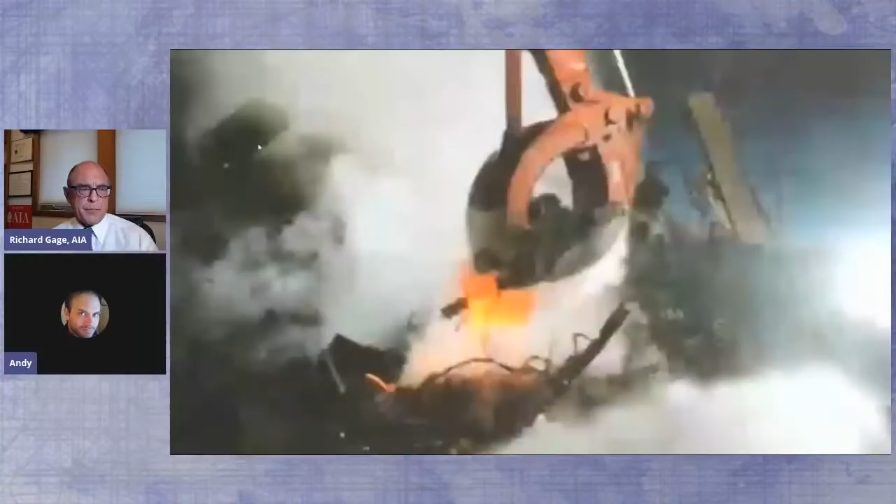You don't need to be an engineer or an architect to see what happened to those buildings. Dit is controlled demolition. Zeker weten. What I saw, it was a classic implosion. The center of the core, the penthouse area, starts to move first, and then the building follows along with it. NIST excluded the documents from FEMA in Appendix C that documented the evidence of melting steel. In an office fire, you cannot generate enough heat to melt steel.

There were these iron microspheres present in all of the dust samples. They needed to have been formed in extremely high temperatures. All the characteristics of the microspheres, along with what I see in the attack of the beams that were actually found, tell me that thermite was involved. In the dust, what we have found is a modern version of thermite, which we call nanothermite. NIST concedes that they found no evidence for explosives. So then we asked them, well, did you look?

And they said, no, we did not look for explosives or residues of explosives. And in fact, the evidence is overwhelming that these red-gray chips are very high-temperature incendiaries. And we have watched as scientific integrity has been undermined and scientific research politicized in an effort to advance predetermined ideological agendas.

If this is a crime, I think everybody agrees it's a crime. Evidence was removed from the scene of the crime. You can't do science when you are deprived of the evidence and when your hypothesis is the least likely instead of the most likely. When the most likely hypothesis in the case of Building 7 wasn't even mentioned. This is not science.

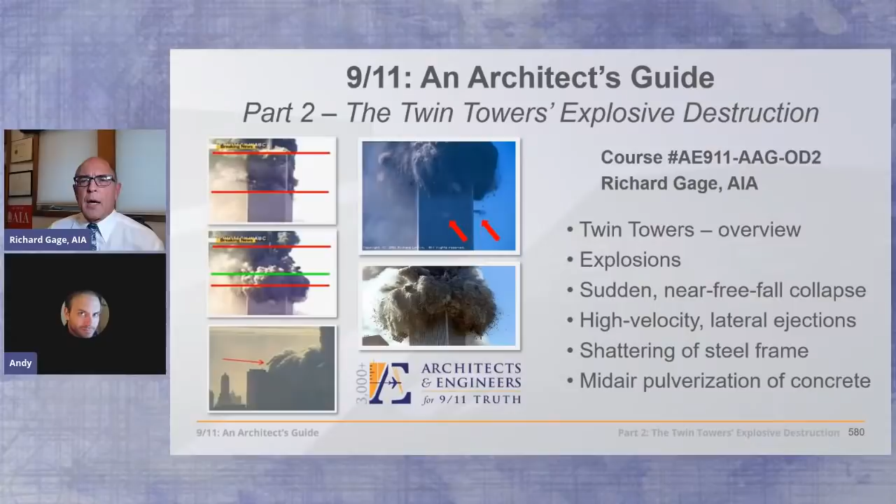We have looked at part 2 today of 9/11 An Architect's Guide. Next week, we come back and look at part 3. We'll be examining the high-rise fires in more detail, the pyroclastic-like clouds, incredible heat, molten steel and iron microspheres, thermite, nanothermite. So don't miss that. That's at 1 o'clock Pacific in 1 week, today being August 12th, so that's probably August 19th. And then after that, we'll start again in September with this series and with part 1, World Trade Center Building 7, 47-story skyscraper that collapses into its own footprint in under 7 seconds. A fascinating study.